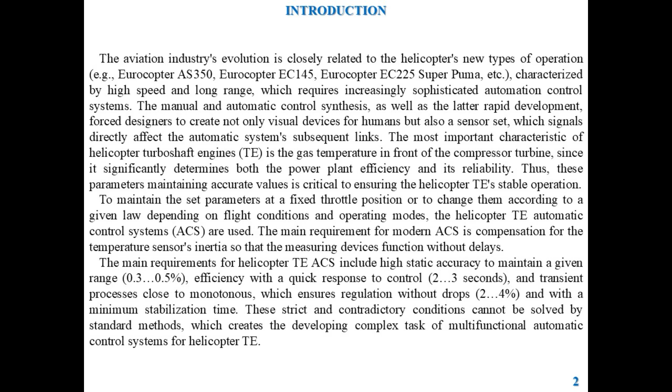The relevance of this advancement is underscored by the stringent and often conflicting requirements for modern helicopter turboshaft engine automatic control systems, demanding high static accuracy, rapid response, and minimal stabilization time, which continue to drive innovation in multifunctional automatic control systems technologies under diverse flight conditions.

Helicopter turboshaft engine automatic control systems, which adjust fuel consumption using input sensors, comparison elements and actuators, suffer from reduced stability margins and permissible gain factors, prompting the use of selectors, correction links with differentiators, and intelligent components to improve static and dynamic accuracy by compensating for sensor inertial delays.

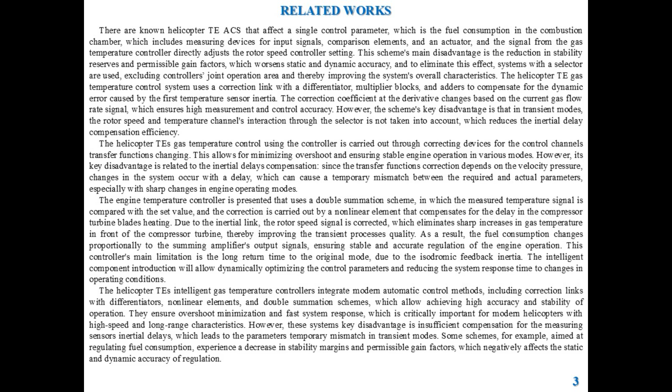The research aims to develop an intelligent gas temperature controller that employs an adaptive algorithm and corrective links to dynamically optimize control parameters, thoroughly enhancing stability, minimizing overshoots and reducing engine stabilization time across various operating conditions.

The proposed controller is based on a double summation circuit that compares signals from thermocouples and a gas generator rotor speed sensor using an inertial link, a comparison element, and a nonlinear unit to adjust fuel consumption, thoroughly compensating for turbine heating delays and stabilizing the temperature regime.

It integrates an adaptive algorithm and corrective link with differentiator to dynamically optimize control parameters in real time by adjusting gain factors and inertial link time constants, predicting temperature trends, and synchronizing system response to minimize transient fluctuation.

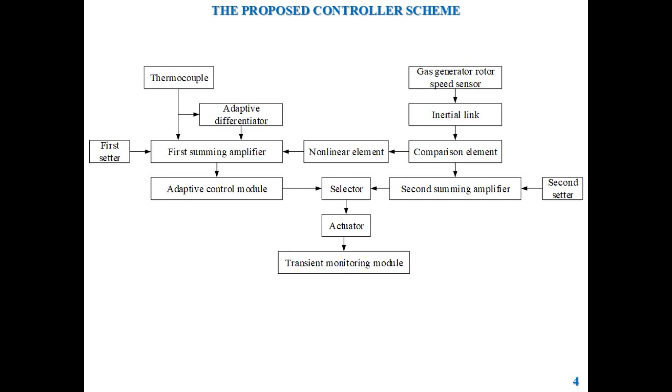Additionally, the controller features an adaptive control module between the summing amplifiers and the control channel selector, an adaptive differentiator in the measuring circuit for preliminary signal processing, and a transient mode monitoring unit connected to the actuator for feedback, ensuring that discrepancies between specified and actual parameters are eliminated to enhance overall system reliability and efficiency.

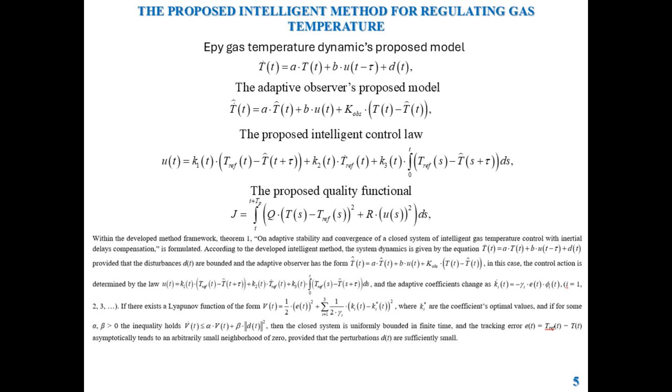The developed method utilized an adaptive observer with state prediction to compensate for inertial delays in gas temperature control, enabling accurate tracking of the desired temperature trajectory. It dynamically adjusts control parameters in real time through adaptive laws and further refines delay estimates with a neural network module. This integrated approach enhances system stability and transient performance, ensuring optimal regulation of engine conditions under varying operating scenarios.

The developed neural network is a deep, fully connected feed-forward model designed to approximate the output function that corrects the estimated inertial delays by adjusting the base delay value. Its architecture comprises an input layer that processes the feature vector, two hidden layers with nonlinear activation functions, and a linear output layer that produces the correction value used in the control scheme.

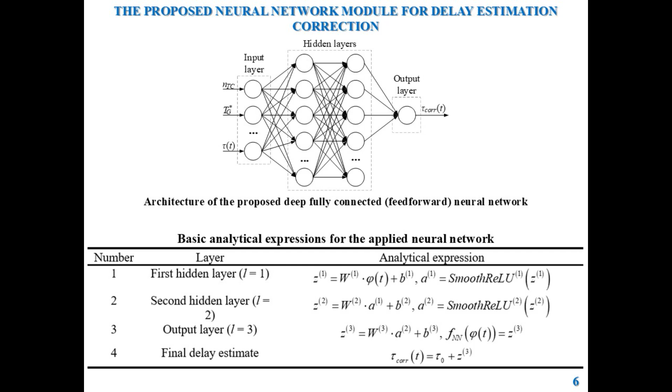The network is trained on historical data by minimizing the mean square error using gradient descent and backpropagation, enhancing the accuracy of system state predictions and overall control performance in the presence of inertial delays.

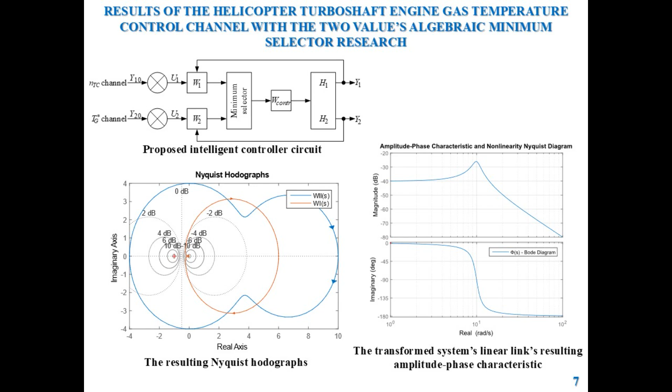The obtained results demonstrate that the proposed two-channel intelligent controller exhibits distinct dynamic behaviors in its individual loops, as evidenced by the Nyquist diagrams, where one channel, gas temperature, remains stable while the other, rotor speed, is unstable. Additionally, the transformed amplitude phase characteristic diagram indicates that oscillations around 1.96 Hz are possible, confirming the theoretical prediction of dynamic oscillatory behavior under specific conditions.

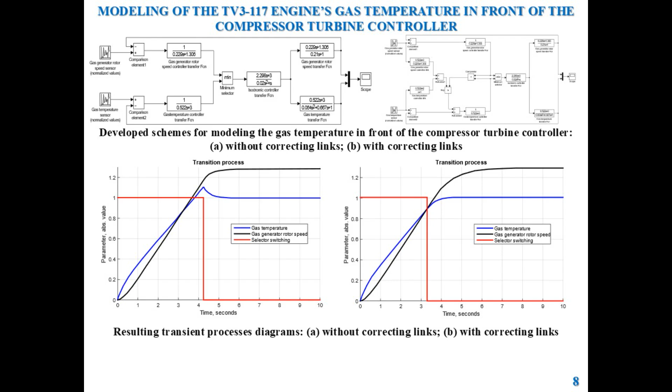The obtained modeling results illustrate the transient process of gas temperature control in front of the compressor turbine. The left figure shows the system's response without a correction link, where a delay in selector switching causes a temporary surge in gas temperature. The right figure demonstrates an improved dynamic response with correction links, ensuring more accurate temperature regulation without exceeding the specified mode.

The neural network consisting of two hidden layers was trained using the Adam optimizer and achieved an accuracy of 99.5% with a loss of 0.5% after 100 epochs. However, further training led to overfitting, reducing the model's generalization ability. The predicted delay values closely match the actual data with a determination coefficient value of 0.97, and the confidence interval approach was used to account for uncertainties in predictions.

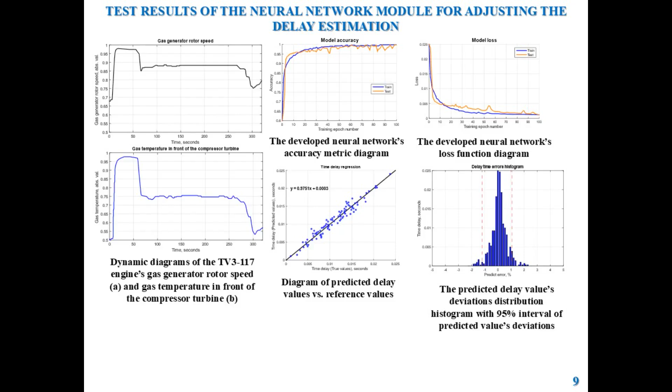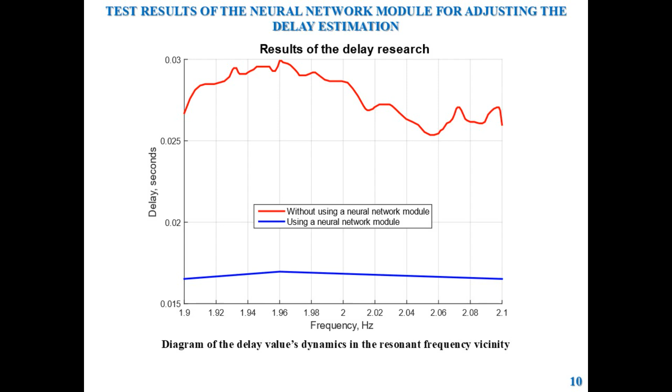The use of the neural network effectively reduced delay by modeling complex nonlinear relations and predicting optimal control modes, resulting in delays not exceeding 0.017 seconds, a 36% improvement compared to the scenario without the neural network. This adaptability leads to a faster system response and stabilized operation in critical frequency ranges. The conclusions are presented in this slide.